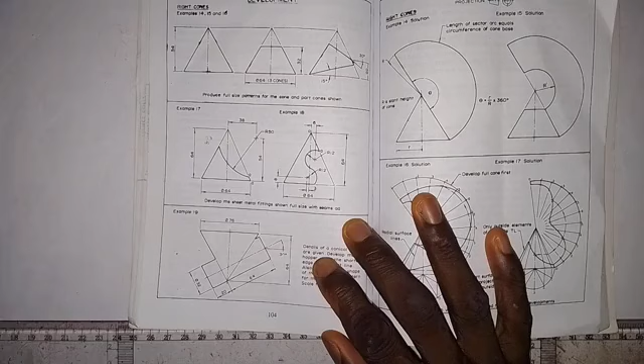This is a right cone, and as we see here, the cone is cut in a very special, truncated way. So we are going to make the surface development of this part.

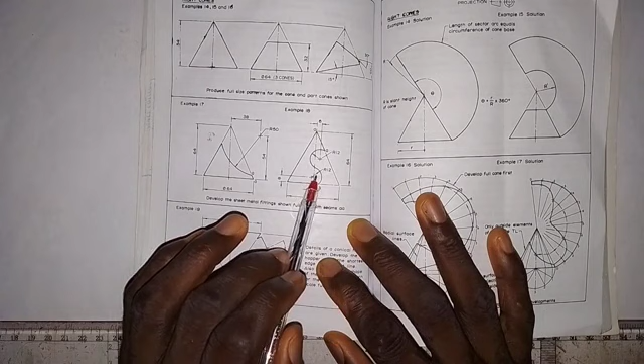The diameter of the circular base of the cone is 64 millimeters, and the height is also 64 millimeters, and the radius of this arc is 12 millimeters. For us to obtain the point through which this arc is constructed, we take a measurement of 6 millimeters from here to here, 3 millimeters to this side, and 8 millimeters up. So that's where we put the pinpoint of our compass with 12 millimeters to draw this arc.

So let's start and see how this work can be done. Don't forget that we want to make surface development of this particular truncated cone.

The first thing we are going to do is draw a horizontal center line, like this. Then we draw a vertical center line. We need to be patient to get this work done, we don't have to rush it.

As I've said, the diameter of the circular base of the cone is 64 millimeters, so half of 64 is 32. We take a measurement of 32 millimeters here, and putting the point here, we are going to draw a semicircle, like this.

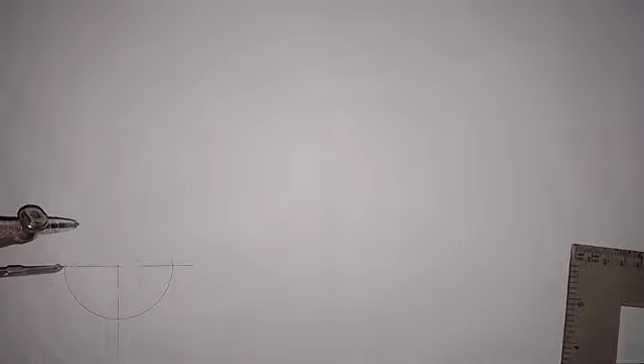This semicircle we are going to divide into 6 equal parts. Putting the pinpoint of our compass here, we make an arc here. Then at this point, we make an arc here on this side. Then with the pinpoint at this point, we make an arc here.

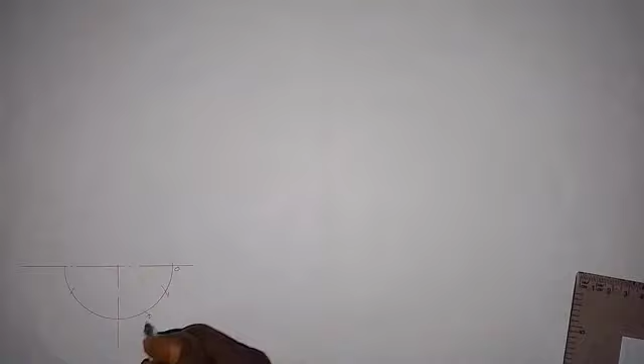Now we are going to label and number this point. So right from here, this is 0, this is 1, this is 2, this is 3, this is 4, 5, and then we have 6.

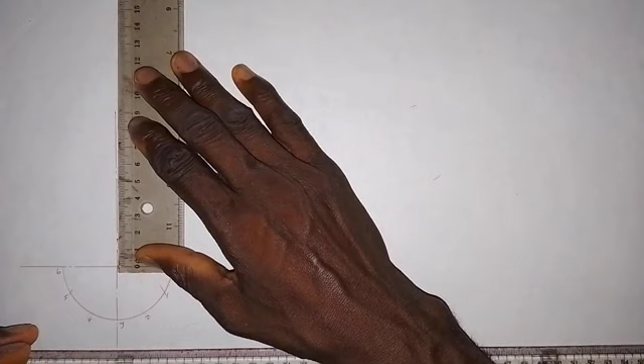Having done this, the next thing is to extend this vertical center line. I think I ought to have done that before. So we extend it, and on this line we take a measurement of 64 millimeters, the height of the cone. So from here, this is 64 millimeters.

With this 64 millimeters, we connect point 6 here with this point, that is the apex of the cone. So we connect it like this, and also we connect point 0 with the apex of the cone, joining them together like this.

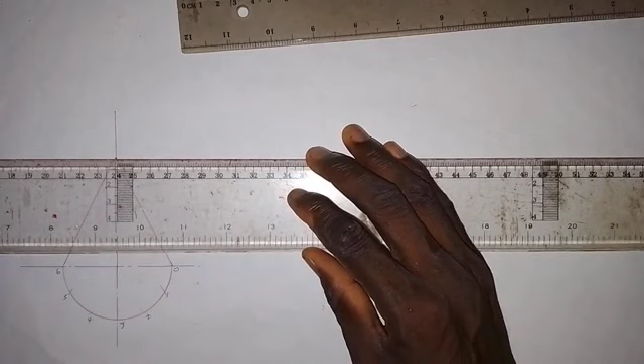The next thing we are going to do is draw a horizontal line from this point to this side, for the arc that we want to draw. I will take a measurement of 6 millimeters from this point, on this center line, to this side. This is 6 millimeters here.

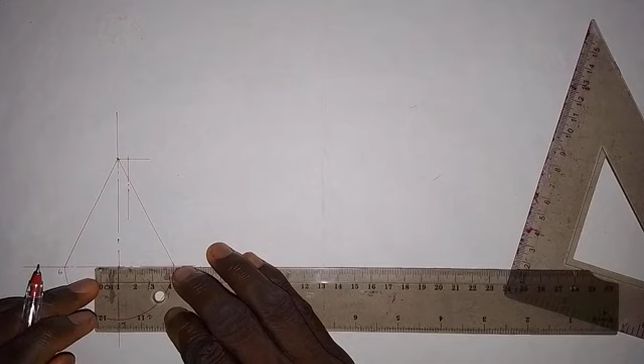Here I'm going to draw a vertical center line, coming down a little bit from here. So this is okay. The next thing is to take a measurement of 3 millimeters from this point to this side. This is 3 millimeters here.

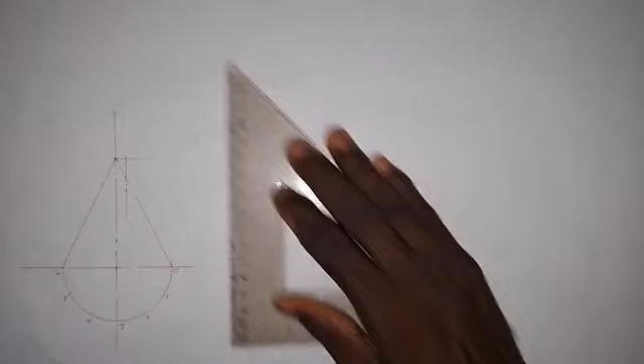Then I will take 8 millimeters on this vertical center line up. This is 8 millimeters here. So here I'm going to draw a vertical line, going up like this. Then from this point where we have 8 millimeters, I will draw a horizontal line. So that's the point of intersection.

The next thing that we are going to do is to draw the arcs.

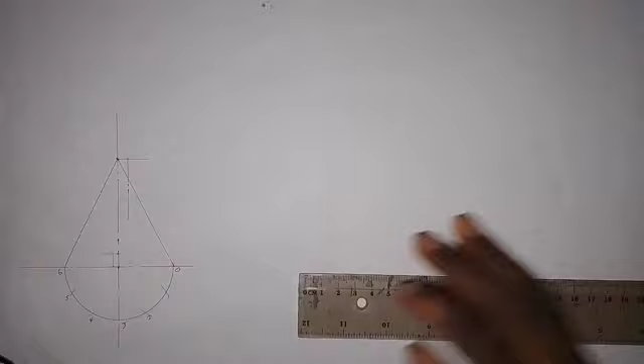So now I will take a measurement of 12 millimeters as the radius of the arcs. So this is 12 millimeters on my ruler, putting it at this point here.

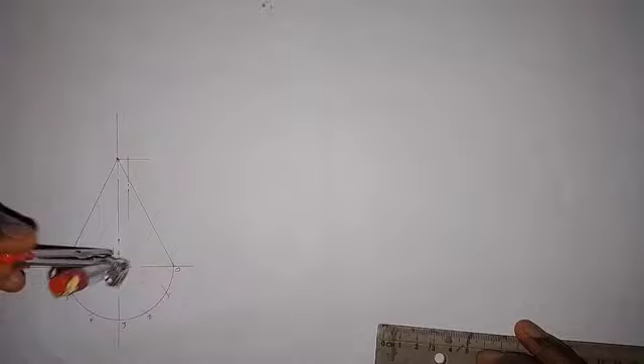So here I'm going to draw an arc from here like this, just to touch this center line. So I still need to draw this center line, keeping that 12. I need to bring it down a little bit because they need to intersect.

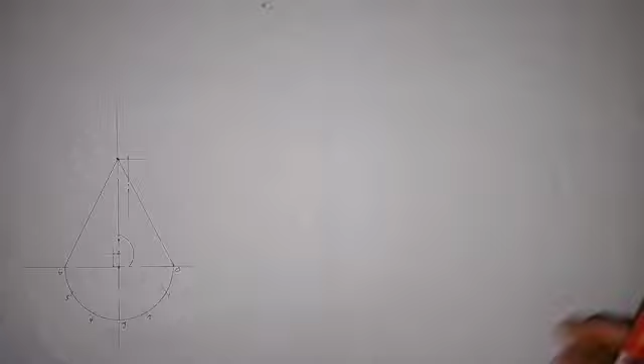Alright, so the next thing I'm going to do is locate the center of the arc that we have in this part. To do that, I put the pinpoint on my compass here and make an arc on this line. So that is the center.

Then putting the pinpoint on my compass here, by the time I put it here, it will touch this arc here, then I will turn it like this. Alright, so that's how to construct the arc as I've done it.

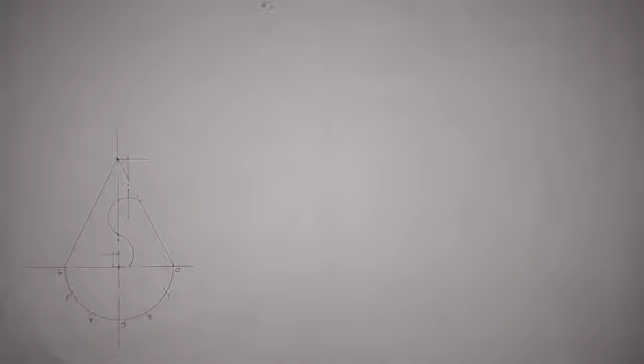So the next thing we are going to do is make this line. This line will be a thick line. So this is a thick line, this line here is a thick line.

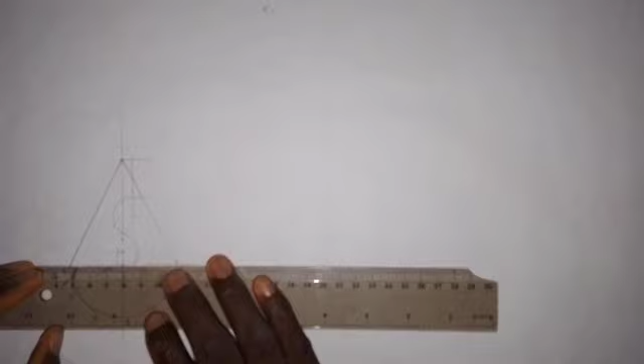So that's what we have left after we have cut this part off. Then this will also be a thick line from here to here. Then I will make it a thick line from here to this end. So that is what we have left, and this is what we are expected to develop.

So then the next thing I'm going to do is this: I'm going to draw a vertical line from point 1 to meet the horizontal line like this. Then from point 2 I will draw a vertical line to meet the horizontal line, and from point 4 I will draw a vertical line to meet the horizontal line. From point 5 I will also draw a vertical line to meet the horizontal line.

Then I'm going to connect this point with the apex of the cone. So I will draw a line from here. Okay, then from here also I will draw a line. And then from this point here, I will also draw a line from here. With this, and then from here, I will also draw a line.

So for us to work this curve out in the development, there's something that we need to do, I'm going to show you. Because of this curve, we need to make sure that we are able to produce this part in the surface development, and there is no line that passes through this part of the curve. So this is how we are going to do it.

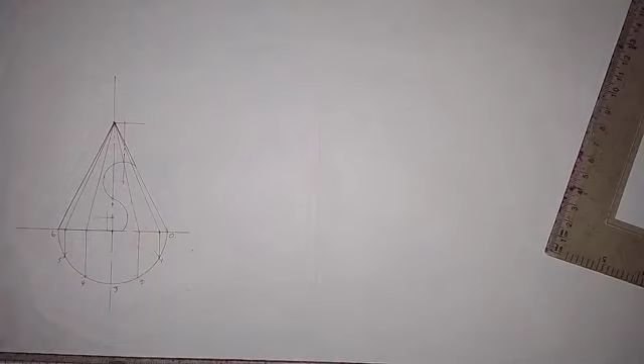So for this part here, I'm going to draw a line that will pass through this point. It goes up to the apex of the cone like this. Let me draw this line, let me complete it.

So also I will draw a line that will pass through—we need this point and this point here. So I will also draw a line from here, through this point, meeting this point on the horizontal line. Then I will also draw a line to touch this particular point here. So this is it.

Alright, so we have this point. So the next thing I'm going to do is bring these points down onto this semicircle. So from here, I will draw a vertical line from this point down.

And then from this point I will draw a vertical line down. Then from this point I will draw a vertical line down.

So now I'm going to label this point. This point I will call point X here, this particular point here, and this point I will call point Y. And this point here, that is in between 3 and 2, I will call Z. So let's take note of that.

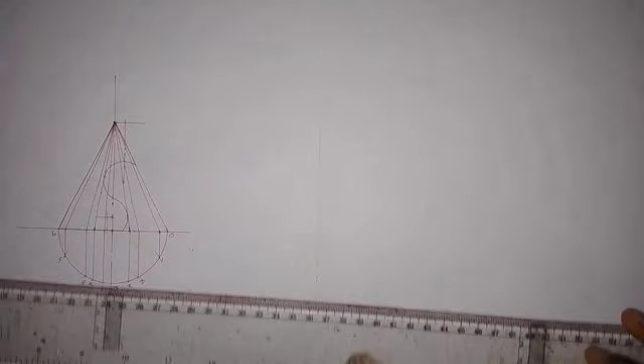Okay, so the next thing that we are going to do now is the construction of the surface development of this cone. So I will come around here and draw a horizontal line from here. Let's call this point O. This is point O here, and this point here will also be my point O.

Next I'm going to take this length from this point O to this 0 here. Don't forget that we are opening from this way, that's where we have the seam. We are opening it from here, so that is on this 0 line. I will take this distance.

So we take a measurement from this point, point O, to this point 0 here, so that's the true length. Bringing it to this point here, we are going to draw an arc like this. So since we are opening from this point, this is point 0 now, and we are opening from here.

The next thing we are going to do is make 12 arcs along this arc here. What we need to do is take distance 1 and 2, or 0 and 1, any one that we like. So just take 0 and 1, or sorry, 1 and 2. Putting at this point, we make 12 arcs on this arc here, so that this is 2 and this is 3. I'm going to pause the video and do the rest.

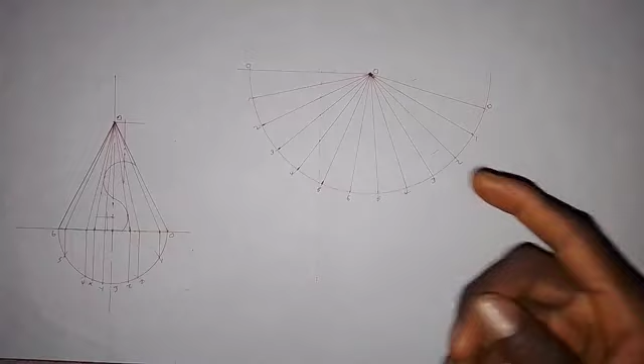Okay, so now I have done it. I've located the 12 points on the arc, and I've numbered from 0 to 6, 0 to 6 here. So 6 is in the middle, as we have here. The next thing we need to do is take all the points we got, that is point X, point Y, and point Z, and get them on this surface here so that our work can be easy. How can we do that?

If you look at this point 3, so it's this point 3 here. This point Z is close to 2. So we put the midpoint of our compass at 3 here and extend it to Z here. Let's get that first.

So then we put at 3 here, since it is close to 2. We put at 3 and make an arc here close to 2. So that's the first point Z on that side. Then I'll put at this point again and make an arc here again, close to 2. So this is point Z here, and this point also is point Z here. Let's pay attention to that.

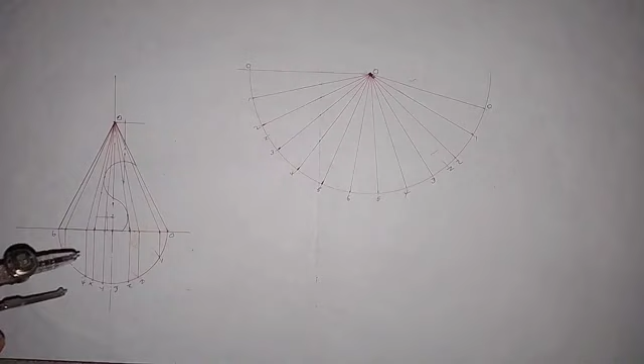The next one is we need to get point X and Y. If you look, point X here is close to 4, and point Y is also close to 4 or close to 3. So we just put our compass point here and extend to X. Let's get X first, so we extend it to X here. Just look at it, alright, so we extend it to X here.

We take this distance and put it at 3. We make an arc here, so that is the first point X. Then we also put at 3 at this point, so this is the second point X on this side. I will write it, so this is X here and this is X here.

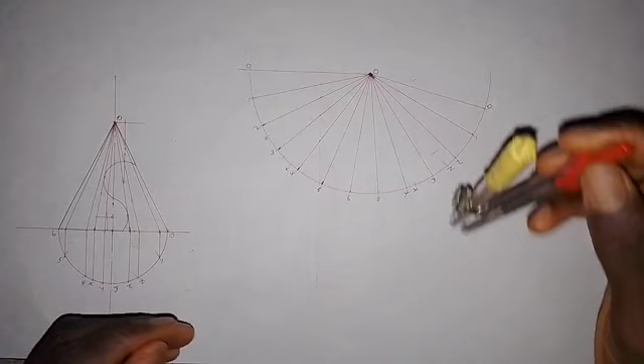Next we need to get point Y. From this 3 again, we extend to Y, so this is point Y here. We take this distance here and put it at 3, so we make an arc here on this arc. Then we put it at 3 here and make an arc. So now we have point Y at this point, and we also have point Y at this point.

Now the next thing we are going to do is connect this point with point O, which is the apex of the cone. We connect this point Y to point O here.

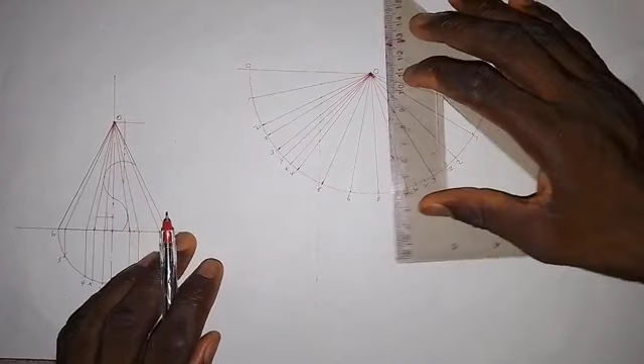Point X, we connect it together with point O. Then point Z here, we also need to do the same thing, we connect it with point O. So here also, we do the same thing, we connect point X with point O. Then point Y, we connect it together with point O. Then point Z, we connect it together with point O.

Alright, I believe we are getting this. The work is going to be long to get it done, but just need to be patient. So let's start the surface development.

We start with point O here, and we extend it to this point 0 here, because that is where we have the seam. So on line 0, we extend it to line 0 here at this point, and bring it to this point here. So we make an arc on 0.

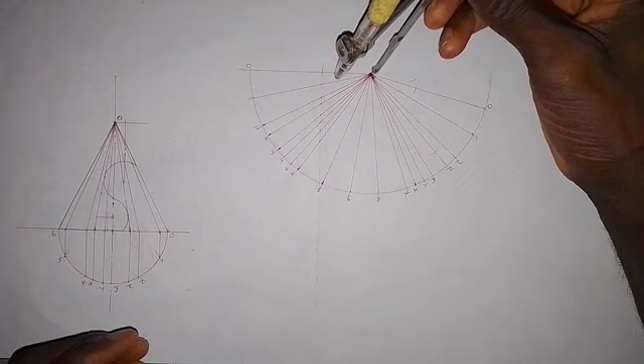Next we put it at 1. At this point we extend to 1, so this point here is on 1. We take this distance and put it at point O here, and make an arc on 1 on this side, and also on 1 on this side.

Next, also put it at point O here, and we extend it to 2. So we still have a point on 2 here. We put it at point O here, then make an arc on 2. We have to pay attention to these parts so that we don't make a mistake. So that is point 2 there.

Let's dot this point out. So we have a point here, point here, here. So we have those points on 0, 1, 2.

Then let's get point 3. From this point we extend it to 3, so this is the point on 3 here. This is the point on 3. So we get this point.

But before that, we have point X, point Z here. So this is point Z. Let's take that, so we have point Z here. We bring it to point O, and we look for line Z. So this is line Z, very close to 2. So this is the point, and also this is the point. So we have that point for Z. Let's dot it out, so we have this point, and we have this point.

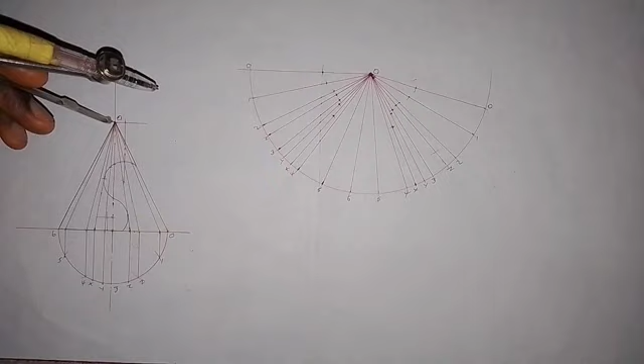All right, so we are moving on. So the next one is, we need to come back to this point, and then go for the second point on this line Z here, which is this point. This is the point I'm talking about.

So we take this distance and bring it here on Z, making an arc here on Z. This is the point. And then we also have Z here, so we make an arc here. This is the point, so we take note of this point, and also this point here.

So then next, we also have a point here on 3. This point here, we have it on 3. So we take this distance from here to here on 3. We bring it here, and make an arc on 3. So this is 3.

So also here on 3, we make an arc here. So we have this point, and we have this point.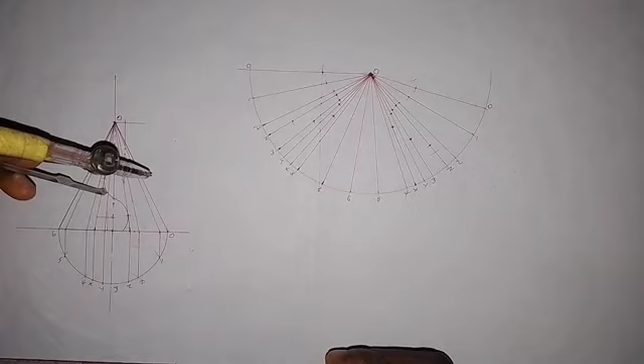All right, so next, we also have a point here on Y. So we have this point on Y, I just put it here and extend it to this point here on Y. This is the point, so we take it and bring it to this point.

So where do we have Y? We have Y here at this point, and then we also have Y here at this point. All right, so we got those points that we need.

So then we still need one more point. I'm going to show us that one more point that we need. The point I'm talking about is this point here. We need to locate this point here, since this part has been cut off and it ended here.

So what we need to do is draw a vertical line from here down. Then let me call it point P. So this is point P here.

So I will take this distance from 3 to P. Don't forget that is towards Z, not X. So we take this distance, then put the midpoint here at 3, and make an arc. This arc is towards Z, and then we also put it here.

So we make an arc here, this is towards Z, so we have this point. So we have this point, and then we have this point. So this is point P, and this is also point P.

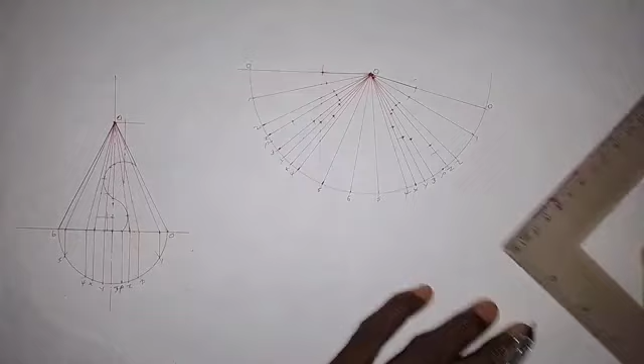Alright, so then with our French curve, we are going to connect these together. So I'm connecting this point together with point P. So it goes like this.

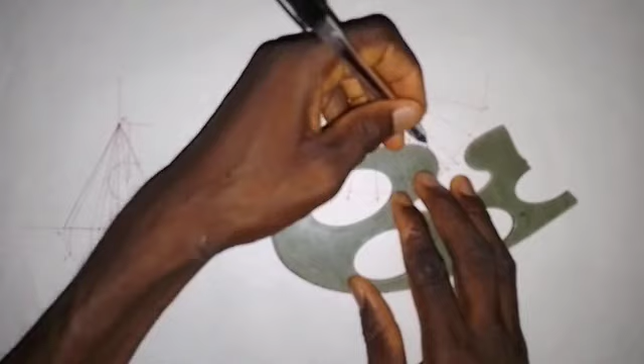Okay, so then I can connect these 3 points together. Then we are connecting this point together. So I can connect these 3 points together. And this, and then here, we connect these 2 points together smoothly.

Alright, so that part is done. So next, we need to connect these 2 points together, point P and this point. So we connect them together like this. Then these 3 points, I will connect them together like this.

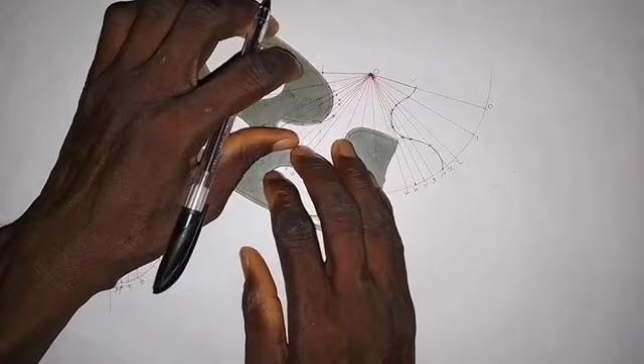So this point, I'll connect these 2 points together. Alright, so these 2 points, or these 3 points, I will connect them together like this. And this point too. Then here I will connect this together like this.

So the next thing I need to do is make this black, to tick it out. I don't have to use my compass, I don't want it to cause an error, so I can use my French curve to do this. So to complete it, just draw from here to here.

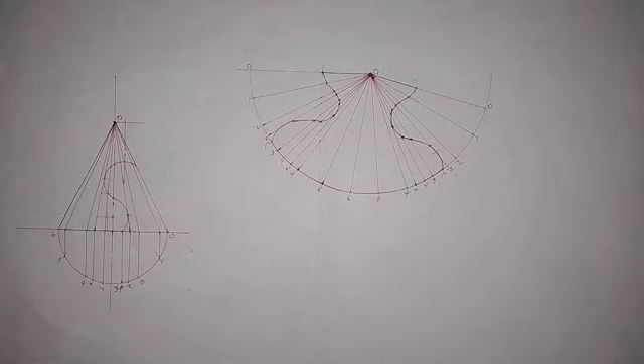Alright, so this is how the surface development looks, as simple as I've done it here. All you need to do is practice. When you practice, you become a master at it. Thank you and God bless you.